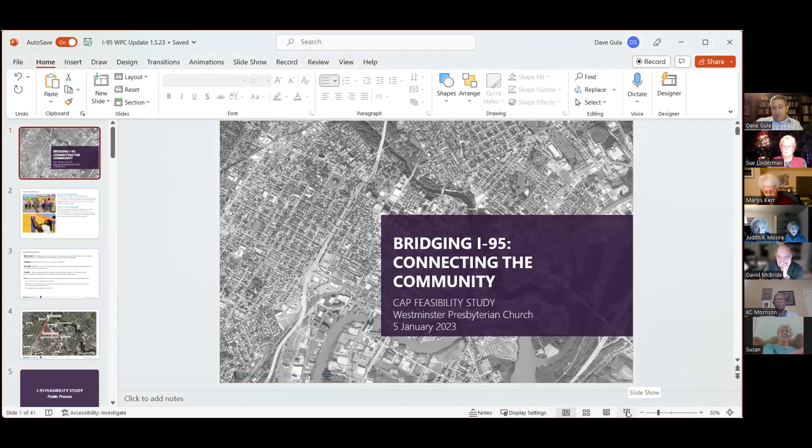Okay, let me ask, because this always happens. Can you see just the slide, or do you see the slide with all the other information on it as well? I'm seeing the slide and then something that says next slide. Okay, let me switch the display. I don't know why it does that, but it always seems to do so. It has a mind of its own. It does. There you go.

All right, okay, so again, my name is Dave Gula. I work with the Wilmington Area Planning Council, also known as WILMAPCO, and I'm going to talk to you tonight about sort of the finished draft for Bridging I-95, connecting the community.

We have been working on this for over a year now. We started November of 2021, and finished with our last workshop in December of 2022—actually, no, it's exactly the same date. We had our first and last workshops one year apart, so that was November 17th. Since November 17th of 22, we've been, well, you'll see the presentations we've made that are part of our process, but we also have been editing a final report.

As I mentioned, the final report is available on the website. I did give the website, but I can send it if that link didn't work. I can send another link to Sue to spread around.

So what I'm going to do tonight is walk you through a bit of the process, just because some of you may not have been around when we did the first presentation to Westminster, and then I'll show you kind of the progress we've made as we've gone through.

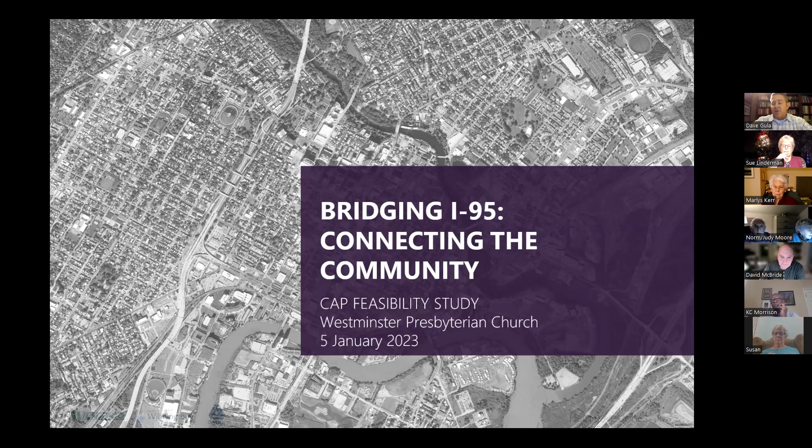This project was an opportunity to work with the community to correct a problem that exists with I-95 currently, which is it's not a very friendly place to live around. When it divided the neighborhood, a lot of the things that maybe the federal government said they wanted to do when they put this in—create a park-like environment on either side of it—didn't really happen. There's a lot of green there, but it's not usable green. As you all who live in the area know, there's a lot of trees along the sides of I-95, but there's a big fence, and you really wouldn't want to be between the fence and the roadway anyway.

So all that green's pretty, but it doesn't really do what it was intended to do. So we were working with the community, the folks that are immediately impacted by I-95 every day, to think about how it can look between Adams and Jackson Streets, looking down from 6th Street Bridge all the way up to Delaware Avenue Bridge. It was designed, and it still is, to build on the community efforts that have gone on with United Neighbors, where you've seen the painting of murals on the bridges over I-95, but also to pull their ideas out, because we know better than to plan for people without including them. If you plan for people and you're not planning with people, at the end of the process, sometimes you really don't get anywhere at all.

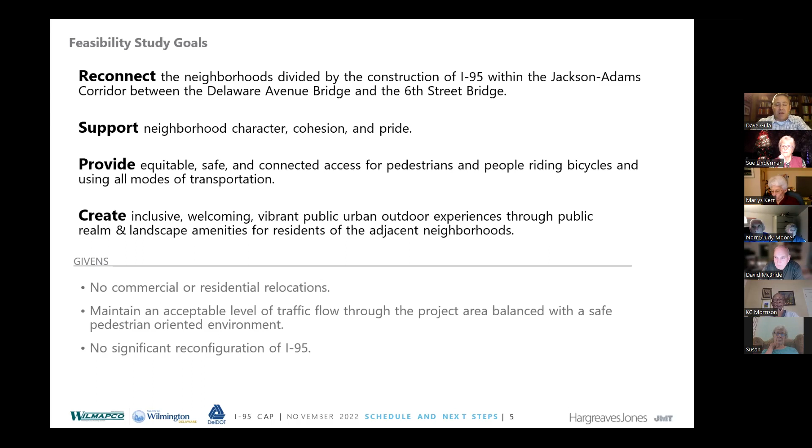But we also wanted to work with the neighborhoods. These neighborhoods you see surrounding I-95: Cool Spring, West Hill, Hilltop, Hedgeville, Trinity Vicinity, West Center City, Quaker Hill. We had very, very strong ties to the communities. We invited specific neighborhood leaders from those communities to come and serve on the advisory committee, along with the project partners, the folks who are going to have to implement it.

I thought we had really good representation, not only on the advisory committee, but also at our workshops from these neighborhoods. Lots of people who live in the area came out to the workshops that we held, most of which were held within the area. There were a couple that were virtual, but the idea was to make it as accessible as possible for those folks to come and be part of this process.

The other people who served on the advisory committee were our elected officials at the city level, city council, the administration, city of Wilmington, mayor's office. Then we actually had participation from the county executive and a couple of county council members. We had really good participation from our state senators and state representatives. And even at the U.S. level, our U.S. Congress people, we had good participation from Senator Coons and Senator Carper's office, with also some representation from the representative, Blunt Rochester.

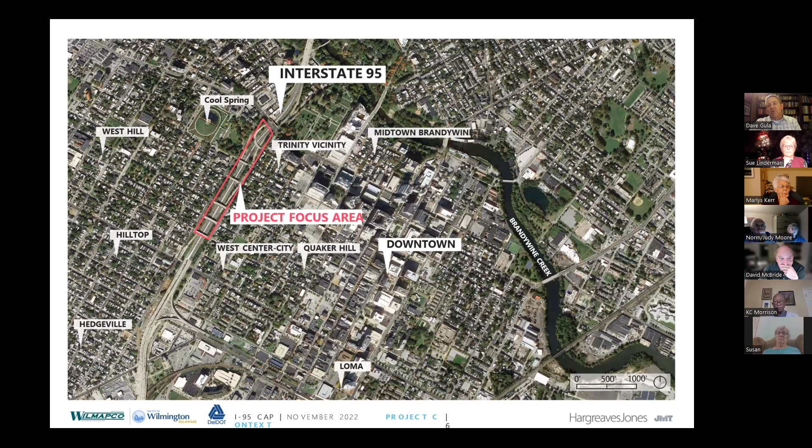So we started a public process. We had a visioning session on November 17, 2021. We had a separate virtual workshop to do the same thing on January 12th in 2022.

And the idea was, for the future of this area, what do people want to think of when they're going to look at the future? What do they want to see?

Phrases like a place for everyone, has to be safe and walkable, has to be well lit, colorful, including arts and not just greenery, but other sights of nature whenever possible. Programmed areas, not just a big field, but some areas that can be staged for community gatherings, some areas potentially for food trucks to pull up. You can sit outside and have a snack.

But then it also comes back to sustainability. Native plantings have to deal with the water that's falling in the area and how you're going to manage that stormwater as you build something new like this. And then some active pieces - what kind of play areas and exercise areas do people want?

With also paying attention to the history of the neighborhood - that can be done through art, it can be done through some historic plaques that can be put in. So all of these things were very important to the community members and the advisory committee members as we went through the initial process with the vision for the project.

At both the advisory committee meetings and the workshops, we had workshops in November. We had an advisory committee, we had a workshop live and in person, held at the Trinity Episcopal Church. And then the next workshops we had virtually because there were folks who could not attend - it was still just coming out of the pandemic. So we did both an advisory committee and a workshop that were virtual.

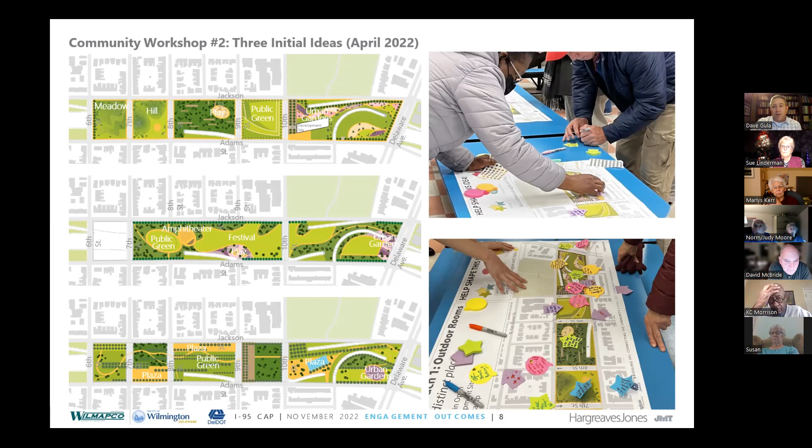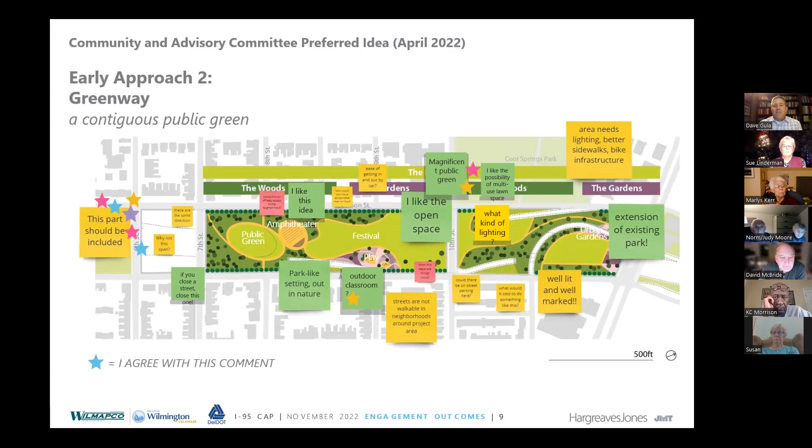So here's an idea of the kind of comments that we got and how we did them. We basically, at our workshops, had all kinds of stickers. We let people write on maps. We wanted them to tell us to look at something, give us their immediate feel for it. This is just a look at, I know it's hard to read some of these things, but this is more the idea of things that people liked that we could carry forward.

So back in September of this year, 2022, we had a third workshop. By then we were at our third workshop, and we asked people, based on what you told us, here's what we came back with. We are showing, and there was some initial traffic analysis done where we looked at the idea of closing 7th Street and 9th Street. I will talk about those potential closures when I get to the traffic analysis section.

But you can see that we built on that concept for each one of these. There were a couple of differences with some of these. We thought at one point we might want some sort of a structure, and we didn't really think about what it could be, some developmental structure, which we showed on 2 of these ideas. And we really heard that wasn't what people were looking for. They don't want to see a big retail area. Give us enough space for maybe some open air markets, give us some space for food trucks. If you can put in a cafe and some restrooms, that would be good. So those are things that we heard.

We did think about not capping part of this area. In this area in particular, you've got a lot of ramp activity going on. It will add costs trying to work around those ramps. But our advisory committee also had the Secretary of Transportation for DelDOT, and she said, why are you not capping the whole thing? She's definitely of the go big or go home school. So we heard that and we carried that forward.

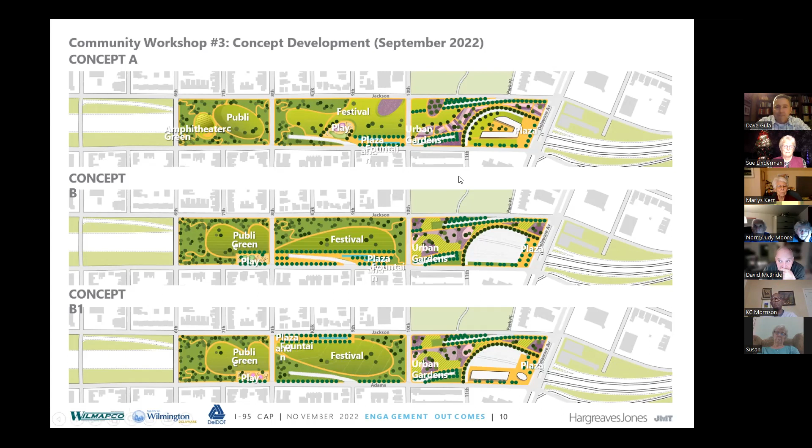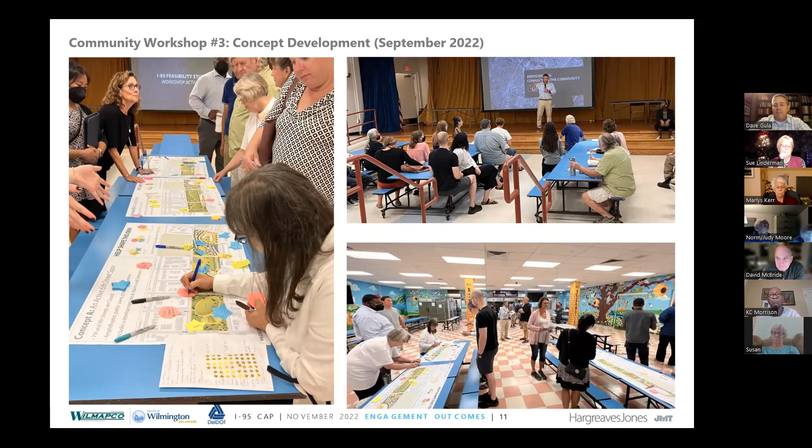We had that same kind of open tables where people could just sit down and write stuff, tell us exactly what they think. We had staffing at all these areas so comments wouldn't get lost. We did a presentation at the William Lewis Elementary School, right on the corridor so folks don't have to go too far to get a look at what we're trying to do and give us their feedback. This is what things looked like after we finished that part of it.

Lots of comments. What do you like most? What do you not like? How should we be building these things? How should we be considering the layouts, putting what things in what locations?

Nobody that attended the workshop said don't cap the whole thing, so that whole idea of doing it all - there's no good reason not to. Money is always going to be a thing, but sometimes you've got to look at how you're going to fund it, not what can we fund, but how will we fund what we want. That's something I learned from a boss a long time ago: don't tell me what you can't do, tell me how you're going to do what we need to do. That's sort of what we're trying to do here.

So we got additional comments. Again, that idea of development came out. People don't want to see - there's a concern even with the potential that we could develop some lower rate housing on the area. It's a huge complication. Who controls that? Who's going to run it? What other things might come in with it? You turn things over to a developer, you end up with retail and other things.

Parking becomes a big issue. Parking is already a bit of a challenge in the neighborhood, and we need to deal with it. But we're probably going to be looking at federal grants to fund portions of this project. You do not tell the federal government that you're spending millions of dollars to cap a highway to build parking - it's just not competitive. You're in a competitive environment, and that is not a competitive grant. So you kind of remove some of those ideas of a regional area where people will drive and park.

So here's what we got. We're really happy with what our project team came up with. We hired a firm we hadn't worked with in the past, because they have done a lot of these projects around the country. They did a notable one at Clyde Warren Park in Dallas, Texas, which is a model for most people when they're looking at this type of project.

They worked on the Penn's Landing proposed project that should be starting construction soon, so they've also got good experience locally. They're an East Coast firm but have offices on the West Coast too, so they kind of know how we think. They were associated with some work at the Boston Big Dig. So it's a team that knew what had been done in other places, willing to bring those ideas here, working with the community to try to get it just right. So we did look to cap the entire section from 6th Street all the way to Delaware Avenue.

Again, a couple of large green spaces: the public green between 6th and 8th, the festival green between 8th and 10th, the knoll right up at Delaware Avenue between 11th and 12th, some idea of urban gardens, lots of tree planting, and I'll show you in one of our diagrams how we propose to get larger trees in there.

We've got some nice convoluted areas for walking paths and some not isolated, but smaller group seating areas. We do have a dog park. We do have a playground for children. We've got an amphitheater with a stage.

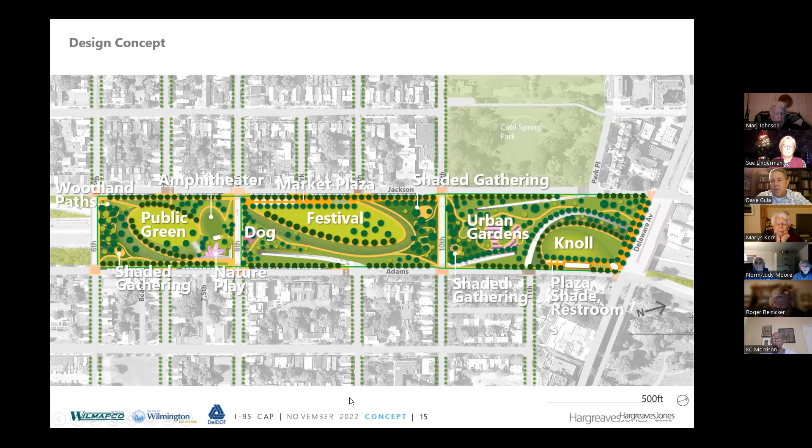So here's sort of what they call a bubble diagram, but basically it gives you ideas of how we parceled out this room that we had. So we've got areas that are shade for people to sit, areas where you can stroll, areas where you can have a large festival, a picnic, or run around activities, an area where you could have an amphitheater where you could sit and watch a community play or a small community music event. We do have a dog park, and there's the playground here.

There's a promenade along here with a splash zone. So it's not like a fountain that's hard to get in and out of. It's like those fountains you see where they come up out of the ground and kids can get out there and get a little wet on a hot day. Because it will be a few years before the shade trees will all be large enough to provide all that shade, that's an area where folks can just get wet.

Some of the other areas are more like a straight walk through, so it's better for bird habitat than a meandering trail. A gathering area, which could actually be a sledding hill up on that knoll area shown closer to Delaware Avenue. And then that whole plaza is a place where you could pull up a food truck.

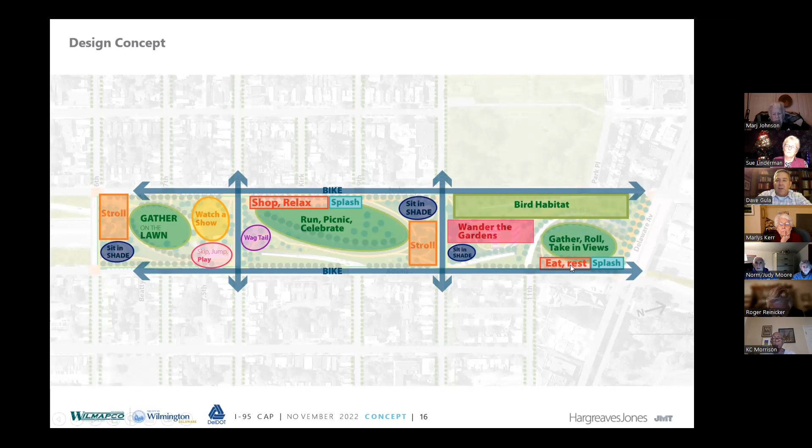So this gives you an idea of some of the spaces. It's a little bit of a confusing piece, but what I wanted to show is the intersections along Jackson and Adams. We're showing intersection treatments. When I get to the traffic analysis, I'll kind of show you what those treatments might look like.

The idea is you have to slow traffic through here. You can't eliminate all traffic. There are ramps here accessing on and off to I-95. There are people who live here who have to drive around, and so you have to allow for the traffic, but you don't have to let the traffic dominate the area. So we want to change the way the intersections look and feel so folks can cross the street comfortably and safely, and I think that's a key piece of this.

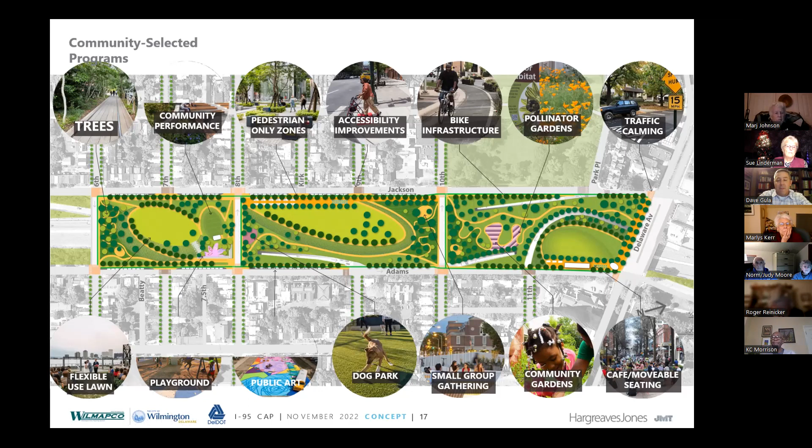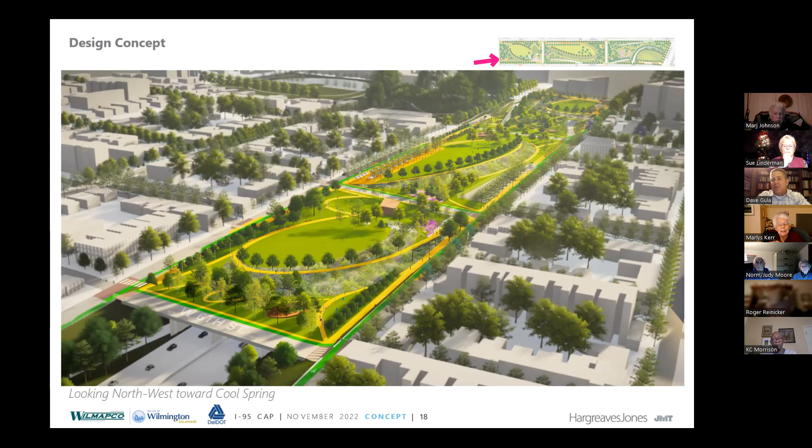And I think that's the hardest thing to figure out in the perspective, as I think Marlis was saying, how do you get in and out? Is there a hill? Is there a ramp? These will help a little bit to show you that the street grades will work very well.

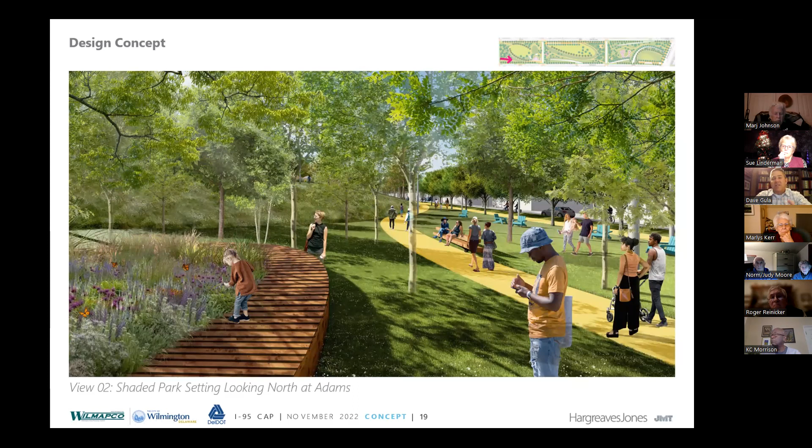So here's one of an area from the south. You're looking up from 6th Street at a space. The amphitheater starts hills, or I'm sorry, this is a little bit of a rise to get to that field that you can play on. It just gives you an idea how people fit into this. That size is hard to look at and say how many people could fit, but just this little space here that we're looking at will accommodate lots of people doing different things.

Here's an idea, a look at the play area. They actually have, I think it was a climbing wall, that might have been part of it.

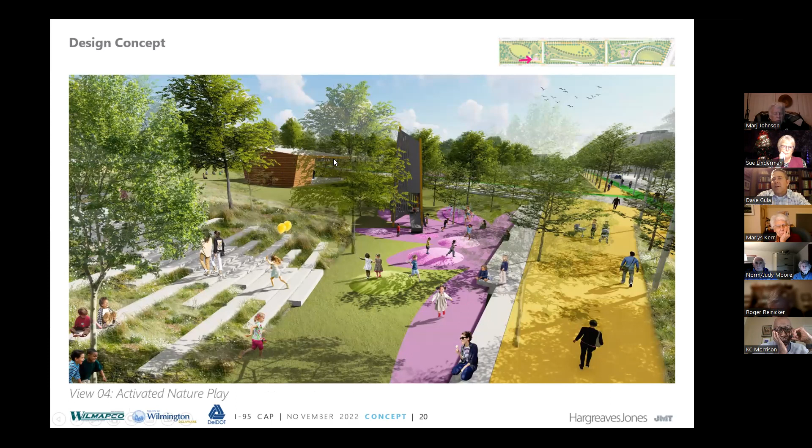Again, the final details are still to get measured. There's a slide, some areas to jump around, some stairs that take you up to the festival area, that field. But you can also see the stage and the restrooms for the amphitheater. So you're getting a look at how much room there is here as you start building things.

This is looking from a different direction at that amphitheater and stage. It looks sort of to the east, so you can see the buildings from downtown, well framed by the amount of greenery that'll be coming up as this thing matures and moves forward.

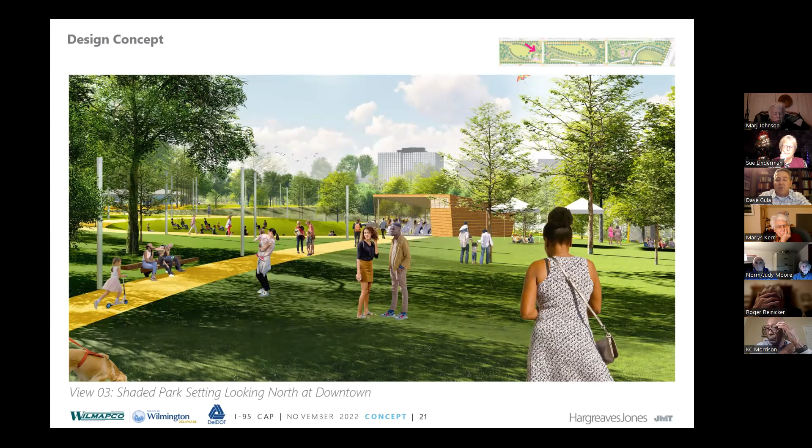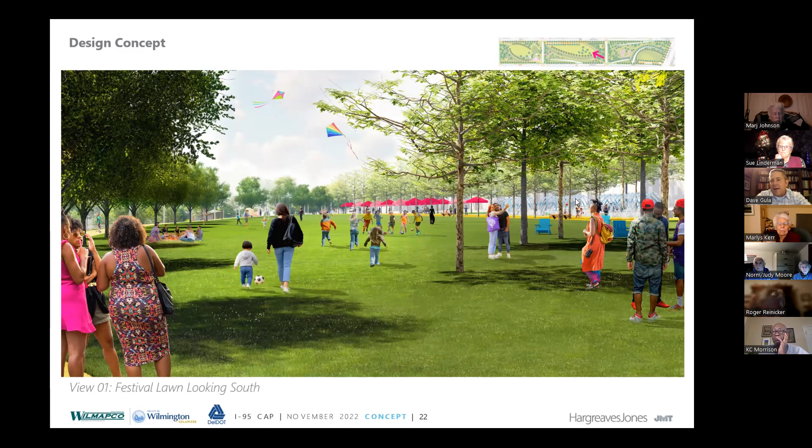This is a look from the opposite direction. We're looking from 10th Street back to the south, towards Jackson. This is the area where we created a promenade. You could do a farmers market there, a flea market, or an art market. You can also see the sprinklers that pop up for kids - if you want to get wet, you can get wet. If you don't want to get wet, you don't have to, but you don't have to climb over a fountain wall to get in. It really encourages people to cool off on a hot day.

This is a perspective from Delaware Avenue looking down. You can see the cafe area here, the covered seating. It's got some solar panels on it, so you can be generating some of the power you need to light it. You've got the ability to pull some food trucks in on the plaza off of Delaware Avenue or down here.

This is the knoll area that was created. We were working with folks at Trinity Episcopal Church, and the idea was - this is something they said would be really nice to have across the street from them.

You do have that 11th Street ramp. This is the southbound ramp from I-95, which is well below grade, as you can see, that rises and comes over and dumps cars off at 11th Street. So we have to work around that ramp. Here's the other ramp, the on-ramp for I-95 south from Jackson heads down. Again, it changes our contour, but we can build areas that are separate from that and still allow that movement to flow very well.

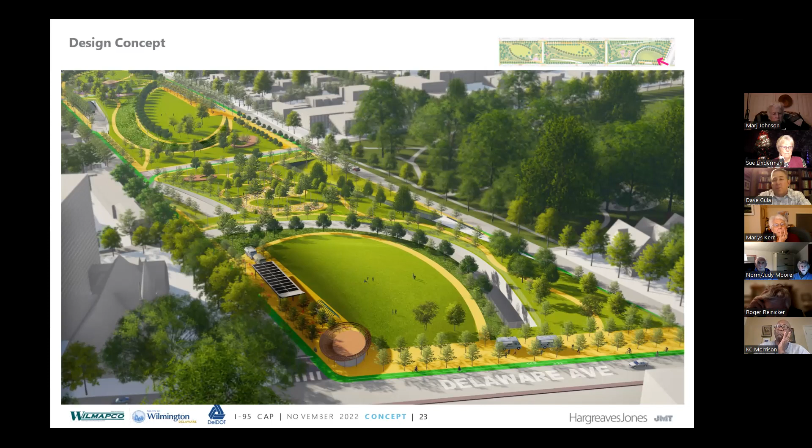You can see some of the other areas a little bit further to the south here. This is Cool Spring Park. This is William Lewis School. So the idea is you've got wonderful greenery at Cool Spring Park, and now you can build off of that.

So circulation - everybody, if you live in the area especially, you want to know how's it going to affect how I get around.

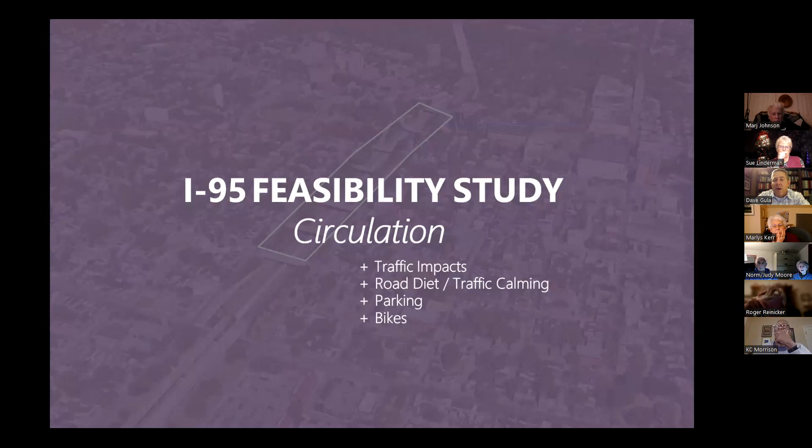So again, we did a traffic analysis. Basically, we collected data, and this was still while I-95 was under construction, but that's an important piece of the study as well. We also had data from before I-95's rehabilitation began, so we know what the traffic looked like pre-pandemic, pre-I-95 closures. Those numbers were all compared to the expected traffic as the city grows.

Now, I've been working in Wilmington since 1989. I haven't been doing the traffic stuff quite that long, but the traffic levels in Wilmington don't change all that much over time. Whenever we've done a project and there's been a guess to how heavy traffic might be in an area of the city 20 years later, we're like, it didn't change that much.

So we've been very aggressive in providing these wide streets, 2 lanes where you might not have ever needed 2 lanes. Jackson Street is 3 lanes - there's 1 lane of parking, 2 lanes of travel. Adams Street's hybrid - in some places it's 3 lanes, in some places it's 4 lanes. There is parking along the curb. So the idea was, the bridges themselves are about 30 feet wide, with 2 travel lanes on each one.

You don't very often see all of these areas maxed out, probably first thing in the morning. I know that 10th Street is a challenge at school drop off in the morning and the afternoon, which is one reason why we did not want to change the way traffic flows on 10th Street, because we know it feeds the school very well.

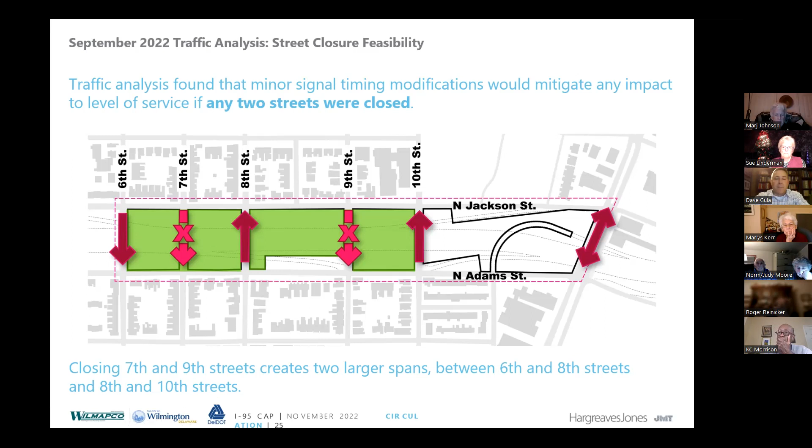So we then looked at reducing the number of lanes that were out there, maybe not in the way you think, where we just take a lane away. We can convert a travel lane to a parking lane. Doing that adds parking to the area, which we're going to need. We already know we need some parking, but that will add the kind of parking we will need, because people will drive to this park, and so you're going to have additional spaces.

The traffic analysis showed that if you retime some of the signals that you need, you can still manage the traffic on Jackson Street with no problem at all by going from 2 lanes down to 1.

Adams Street, we did a follow-up. They said we can make this work to about 8th Street. At 8th Street, you've got a lot of ramp activity that starts. So basically, the recommendation is that, again, we've got a couple years of design ahead of us. We need to go back and do those traffic analyses to make sure they work, especially now that we're getting back to normal with traffic around I-95.

The other thing we can do, and we work closely with the city, is we can just close the bridges we want to close with pylons for a month or two and see how the traffic works around those. That gives us a real world chance to test what the modeling theorists have told us.

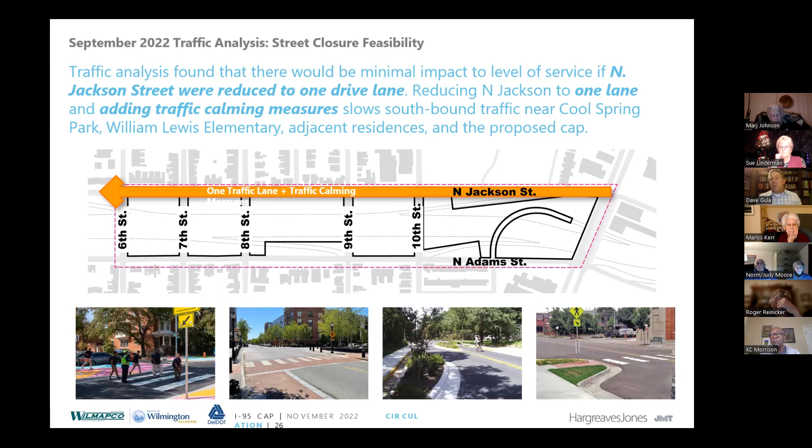So yeah, I just covered this slide. The other things we wanted to talk about with that traffic calming idea is the ways that, even if you don't necessarily narrow the streets by taking the lane, you can raise the intersection a little bit.

It doesn't have to be like when you go over a speed bump. We won't have speed bumps in Wilmington, the city's against them, but a raised intersection is a gradual slope, and it enhances that pedestrians are going to be here. It makes you look around, slow down, take a look, and treats the intersection differently.

Usually you use a different kind of pavement so that as a driver, you sense that there's a change here, something going on. We could use what they call chicanes, where you basically create your own obstacles to slow traffic. The straighter the path, the faster cars want to go.

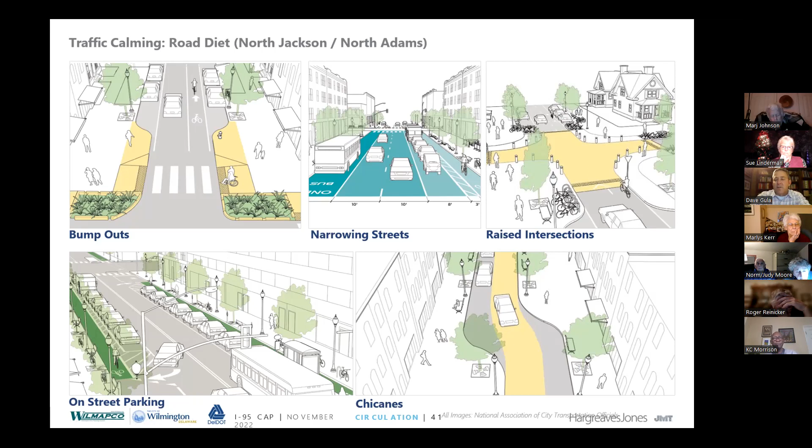And the on-street parking is always good. It adds what they call friction. People tend to slow down when they have parking on both sides of them, as opposed to when you've got a lane that looks like an artery, a highway, you're going to drive like you're on a highway. So all these things are tools that we can use as we go forward.

Here's some things. We also might be able to add bike lanes in these areas. And that's something that's important to the city. It's important to some residents. Not everybody wants to use a bike lane. Not everybody has to use a bike lane. But if you want to use a bike lane, we need them out there. Otherwise, you're mixing with traffic and it doesn't feel comfortable. So that's another way to calm traffic.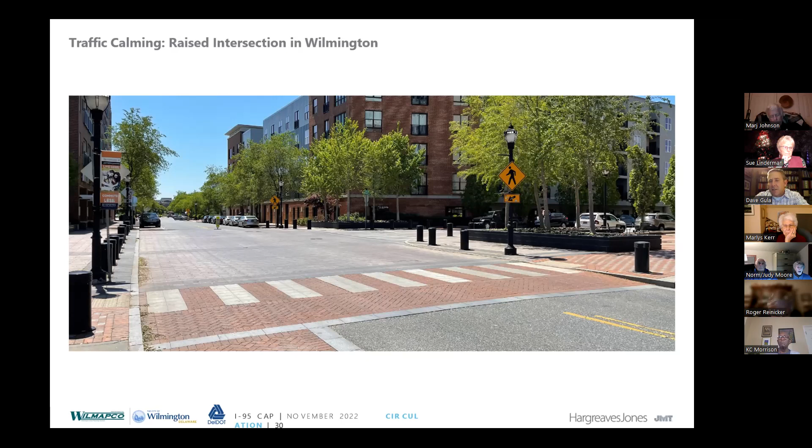Of course, all the intersections will have full pedestrian signalization, so you'll have that on your side as well. Here's a look at how a protected bike lane could work.

Say this is Jackson Street. You've already got a lane of parking. You've got a travel lane. You have another travel lane. You could take that travel lane and make it into two-way bike traffic. So you wouldn't have to do both Jackson and Adams. You could have both your bike movements on one of those two streets. It probably works better on Jackson, but we'll see as things move forward.

It also tends to work better, as was pointed out to me. We just got a comment the other day. If you shift the travel lane over, shift the bike lanes all the way against the curb, and put the parking, now you've created a protected bike lane. And it might actually work better in terms of how people are going to access, not necessarily the park, but a bike throughway through town is missing. If you're a cyclist and you're trying to get north, south, you don't have a lot of choices. And the streets are pretty hairy.

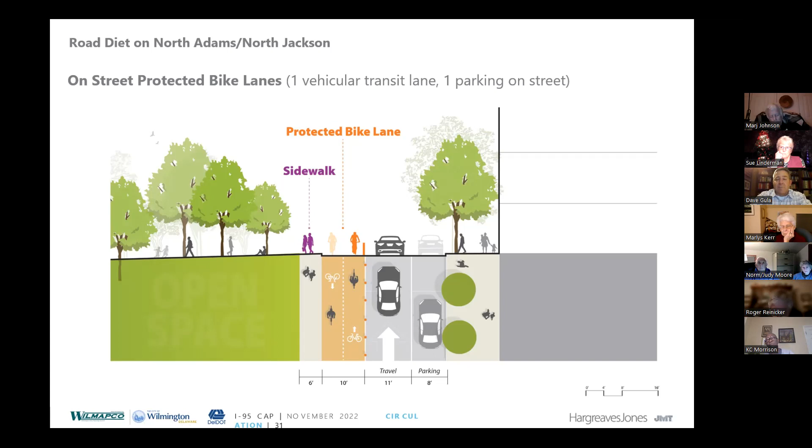So that's something to look at. Over time, when the cap is built, we could actually shift the bike lane right onto the cap. That takes it completely out of traffic. And that's another way to do this as well.

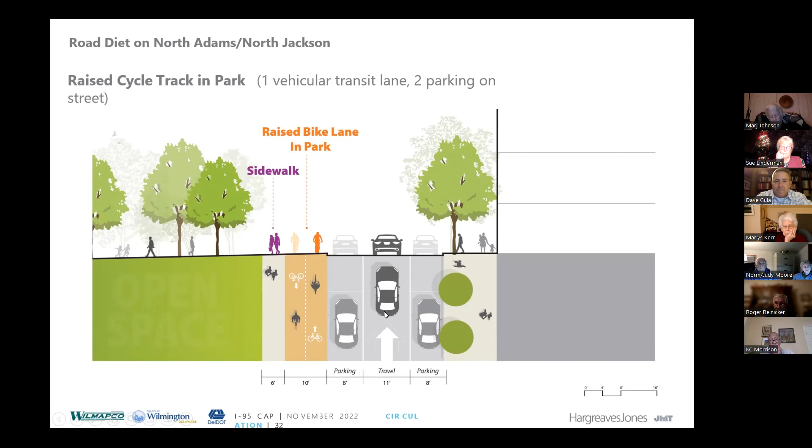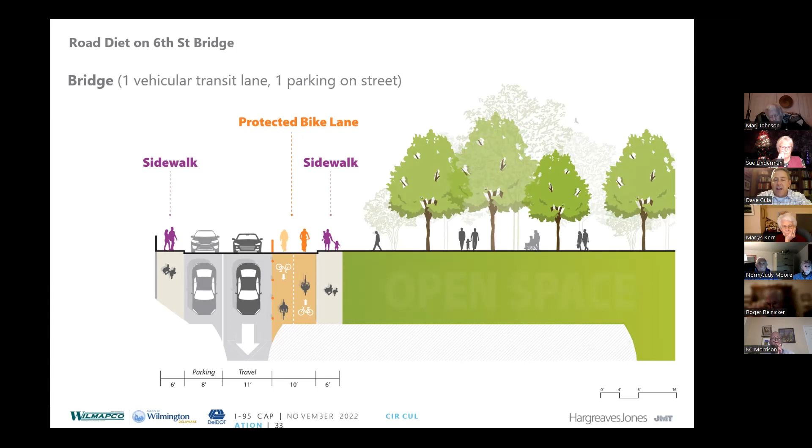So then you'd have a parking lane with a center travel lane. On the bridges, I said we have about 30 feet. Technically, that's 3 lanes. You don't need more than 10 feet for a travel lane, unless you're trying to maneuver a large truck, which we wouldn't really be doing. So we got space for a parking lane. Parking lanes are actually only 8 feet. You could do an 11-foot travel lane, and that additional 10 feet could also give you bike amenities on the remaining bridges. So if you didn't want to go two-way traffic on one of the bridges, you could do these things as well. So the idea is that we have a lot of options, and we don't have to decide all those things today.

This is limited. I think there are some other areas we can look at. This is over 100 spaces. That could serve the park on a normal day. So we think we're in decent shape that way. There's actually a line of parking along Cool Springs that's almost never occupied. And if you were doing that travel lane removal south of the ramp entrance, you've got another whole stretch where you could have more parking. So there's a lot of options. We think we're going to be okay, but as we move forward, we have to kind of iron those things out.

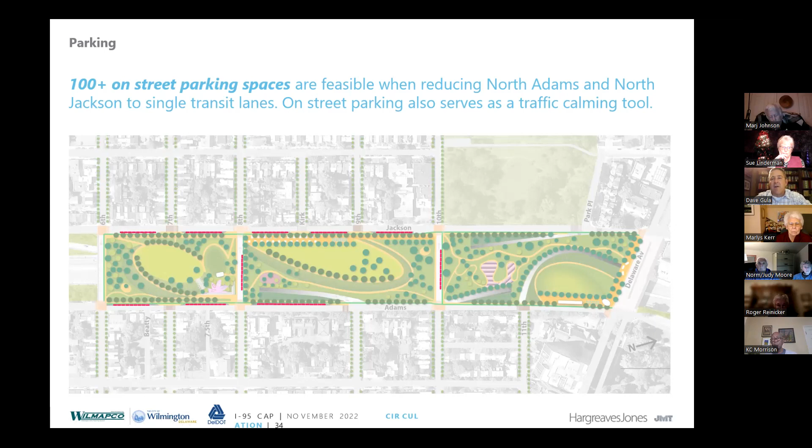This is going to feel very much like a tunnel, though, and that's a concern. DelDOT doesn't have a tunnel section — there are no tunnels in Delaware. There are a couple things that are short and could almost be a tunnel, but not really. If we have to go to a tunnel, we've got to talk about potential fire suppression and ventilation within the structure. There's a lot of other costs that could come in, and since DelDOT doesn't have a tunnel section, it would mean a whole other section of DelDOT to manage and maintain this.

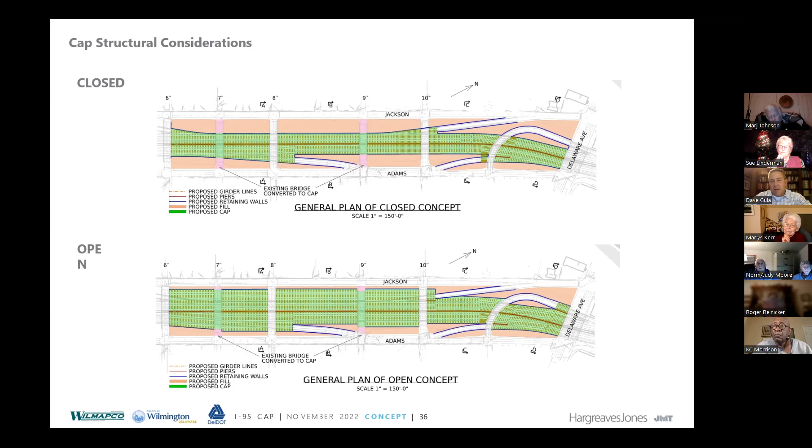I'll switch this around. So Adams Street's lower, but to answer the question, there's no ramp needed to get up into the park because there's ample clearance underneath the existing bridges for trucks and all the traffic that passes on I-95. So we can basically start right about grade level. There will be some slopes built in to the park to try to level areas up a little bit, but the idea is you don't have to step up on ramps to get into the park. It's a pretty clean move.

I do think the state favors the open plan rather than the closed plan, which is more like a tunnel. But we will see — those are all things that will get decided as we go forward. There's a lot of work to do.

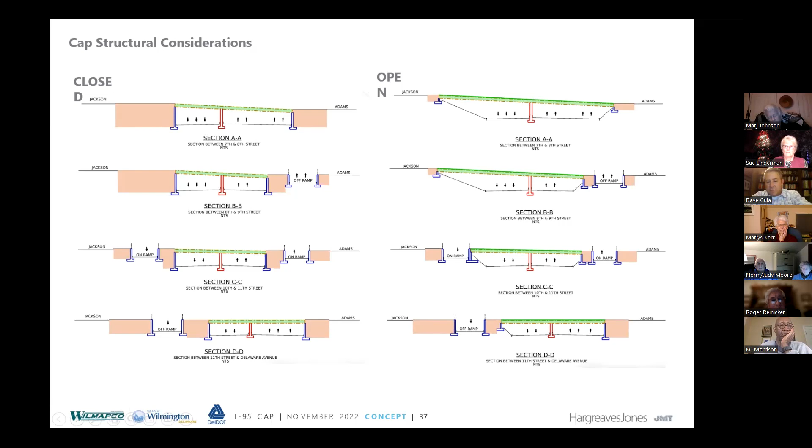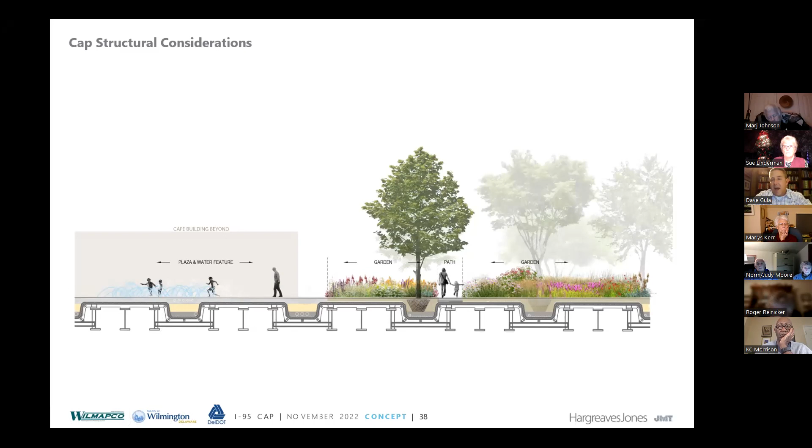This is what the structure would look like, that deck structure. Where you see these I-beams, those are the I-beams that would support it — they might be concrete, they might be steel. They're going to build a substructure so that you have troughs, where you plant your big trees. Big trees are going to need a couple of feet for the root systems, and you're still going to have a couple feet of dirt over everything. You've got to manage your stormwater — there's a lot of things going on up there. But this is how you build the deck so you can put trees on it and still support them all. It's still less weight than building a house or something else over I-95, and that happens all the time.

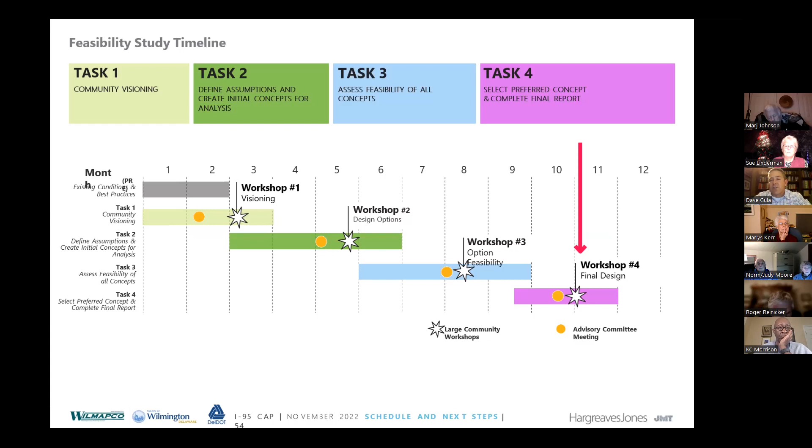So we wrapped up all our workshops. This slide doesn't show much more than where we did all our workshops. We had our fourth workshop in November, on the 17th. And so, these are the steps needed to ratify this study.

It's a feasibility study. Again, is it feasible? Sure it is. So we showed you how it's feasible. We completed a final draft. People can review it now.

It's online. We presented it to our public advisory committee. They're the folks we talked to about our public outreach policies and how we're doing, and they give us the heads up, yes or no, on whether we did well with the public outreach. We got a lot of endorsement from them. We added a revised draft after we got all those comments to the website, so the most current version is there.

We presented it to our technical advisory committee. That's our partner agency—DELDOT, DTC, the city of Wilmington—and they're all very much on board and endorse this study. So the feasibility of this project is not questioned.

Cost is another thing. The cost is in the appendix, but basically each of those sections is a little over $100 million to build. So phasing it might be very important. You might not be able to do it all at once.

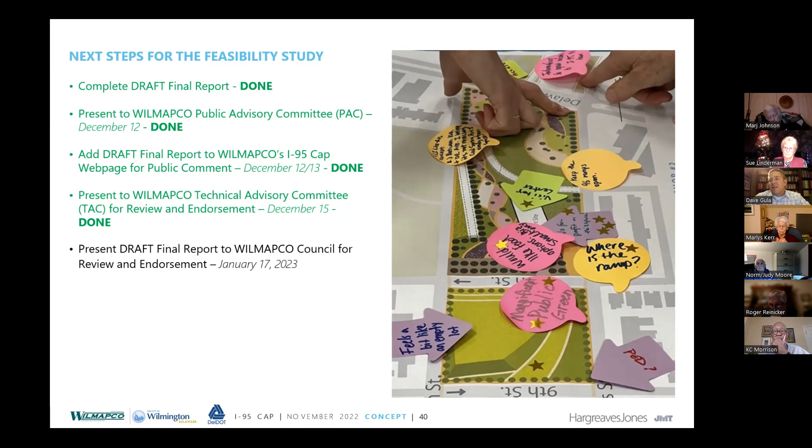I guess the last piece of this is that our council, who's the final word for WILMAPCO, votes on the 17th. We expect endorsement because that's basically the same partners who sit on the technical advisory committee. And I guess the last thing I have to show is this—so that goes back to the idea of phasing it.

And we broke down each of the sections so that if you have to phase it, you have a better feel for it. There is no set-aside pot of money for this project. So grants are going to be very important. There are federal grants that are keyed just to this.

There is one called Reconnecting Communities. It's going to be a very competitive grant. It's a 50-50 grant, which means you only get 50% of the cost—you've got to come up with the other 50%.

So what's going to happen is, assuming our council approves the feasibility study, we hand it to DELDOT, saying: you asked us to tell you if this is feasible and how much it might cost. It is feasible, here's the estimated cost. And then the state of Delaware has to figure out if and when and how they're going to move forward with the project.

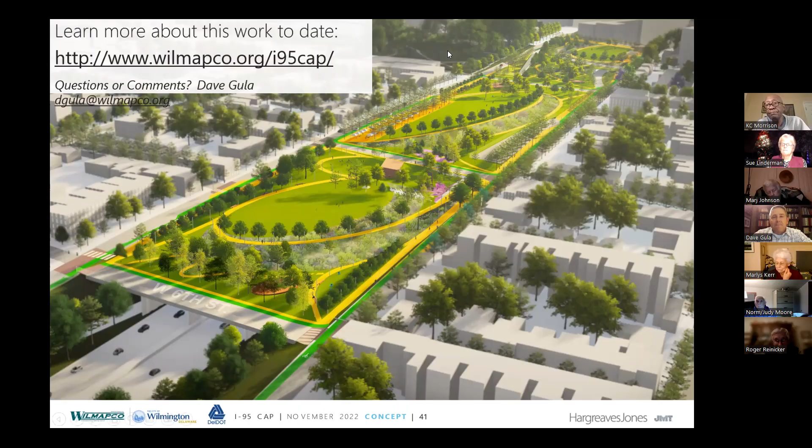Hi, David. Thanks very much for wonderful presentation. And as you were going through it, I kept sitting here thinking about the money part. So I'm glad you brought that up in the end. Yes.

I know you don't know where the money is coming from, but is there any expectation that there is the will out there in the community to find the money to do something like this? How feasible, how likely is it that we'll find the will to build a project as big as this? It appears that there's will there. It is going to be a political question.

There's a lot of thought that, hey, the president's from Delaware—is that going to help us? I don't know, I'm not the money guy, and I'm not political if I can help it. So I don't know that it helps us. I know we've got two very good senators and a very good U.S. representative, and if there are funds that can be leveraged for this, I think they're going to look hard at those things.

We have a meeting next week with Senator Coons' office to talk about this project. I think the idea is you start by applying for grants to help fund it, and then you go looking for the other pieces of the money. Since it's been done in other cities, the will is there in communities—it's not like it hasn't been done, and it's not like they're getting a discount on theirs. So people find ways to get these things done.